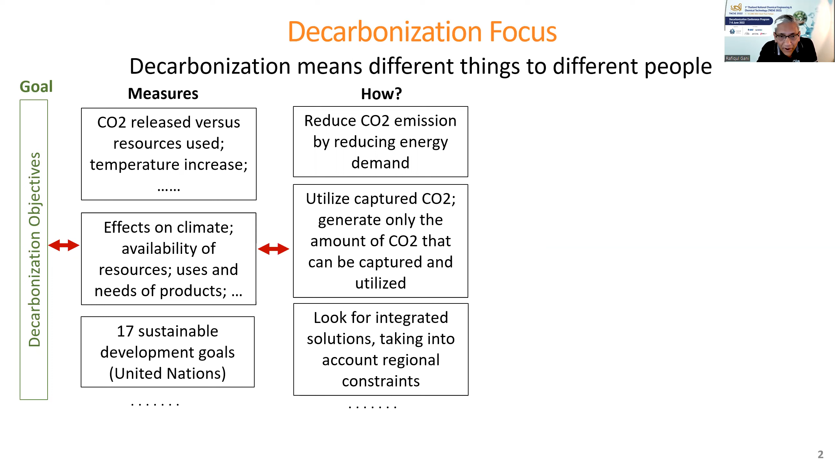How to achieve these measures? Obviously, by reduction of CO2 emission, by reducing energy demand, utilizing captured CO2, generating only the amount of CO2 that can be captured and utilized, looking for integrated solutions, taking into account regional constraints, and many more. The means to achieve these goals would be integration of ideas and concepts to develop significantly better technologies than we currently have, use new conversion and/or separation technologies that will also contribute, and develop and use methods and tools that can give significantly better solutions than those we are currently using, and again, many more.

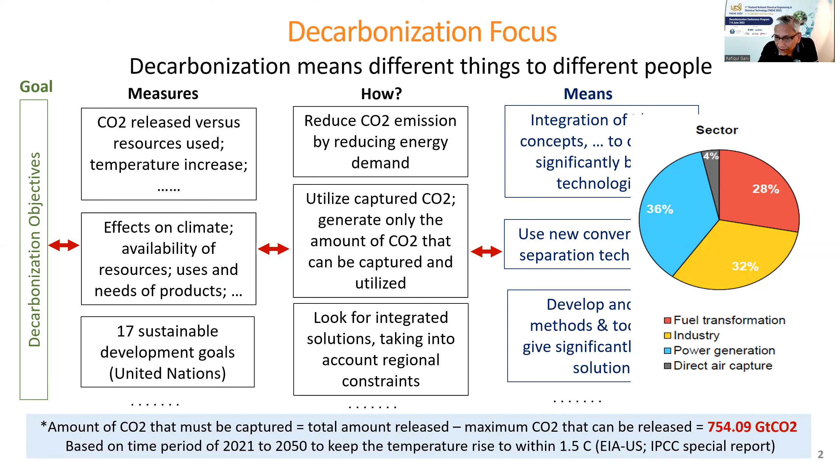We also need to take into account that within the period 2021 to 2050, if we want to keep the temperature increase to 1.5 degrees Celsius or less, we have to capture and utilize or sequestrate at least 754.09 gigatons of CO2. Out of these, 32% needs to be tackled by the industry.

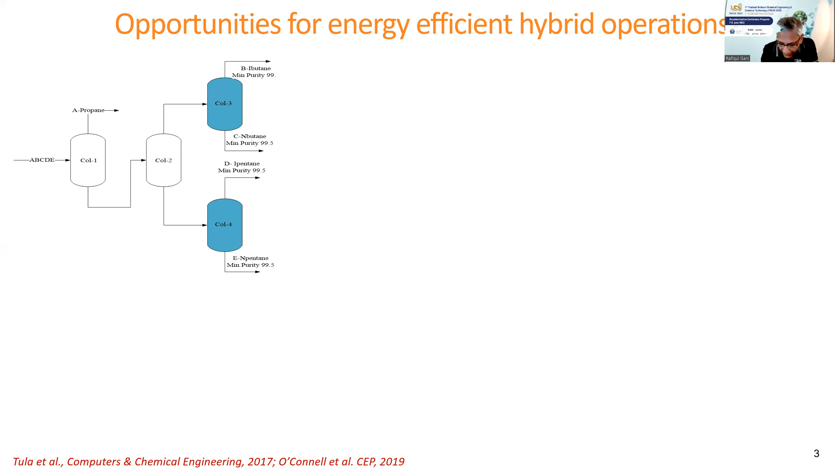Besides capture, utilization and sequestration, the CO2 amount can also be reduced by other means, for example, improved design and operation of processes. Chemical processes by definition are energy intensive, and within chemical processes, distillation operations are the most energy intensive. The figure on the left shows a distillation train that can be found in many petrochemical refinery plants, and they are the most energy consuming operations within those plants. So what can we do about the two distillation columns that are highlighted, which are among the highest energy consuming operations?

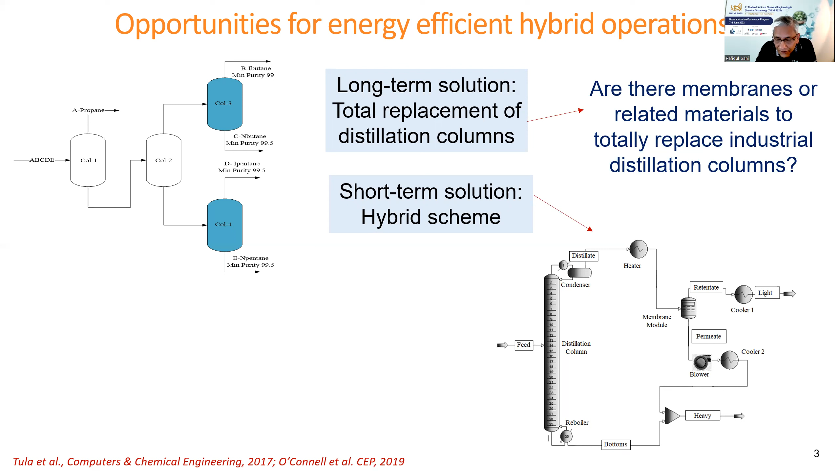We have a long-term solution: replace the distillation columns totally. However, that long-term solution is not yet available for use, so we can think of a short-term solution. The short-term solution is to integrate or combine the existing distillation column with a small membrane operation, which is completely feasible, combining them such that the distillation column does not use the same amount of energy, and at the end of the membrane operation, we get the purity of the product we are interested in. The rule for combining these two operations to get a hybrid scheme is to combine the two techniques, distillation and membrane, such that each operates at its highest efficiency. Savings of up to 10 to 50% can be achieved depending on the separation being done.

Considering that there are more than 200,000 distillation columns operating on Earth, the scope and significance would be very large if we can augment the existing distillation columns with a small membrane in a hybrid scheme, because we would be making an immediate effect. With that, I will not go into much more detail on improving chemical process efficiencies, but go directly to the topic of capture, utilization, and sequestration.

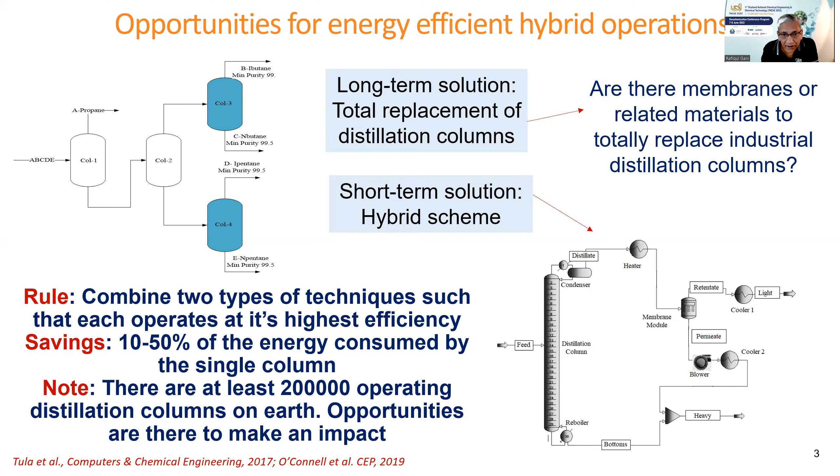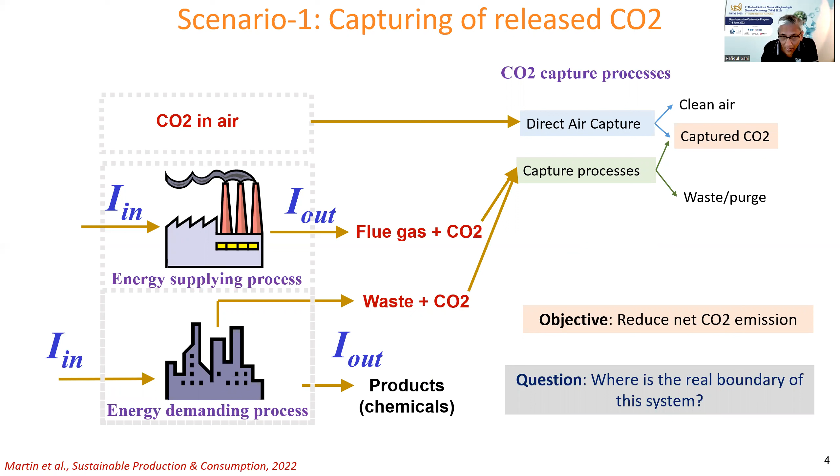What you see in the figure is a network of different alternatives that are possible to capture CO2 from air or from flue gas and get a purity of 90% or higher in the captured CO2, while also producing clean air. The network shows that steps 1 to 4 are needed for the capture process, because the capture process may need more than one operation. Then step 5, which also needs more than one operation but is shown in a simplified way, represents the utilization and sequestration alternatives.

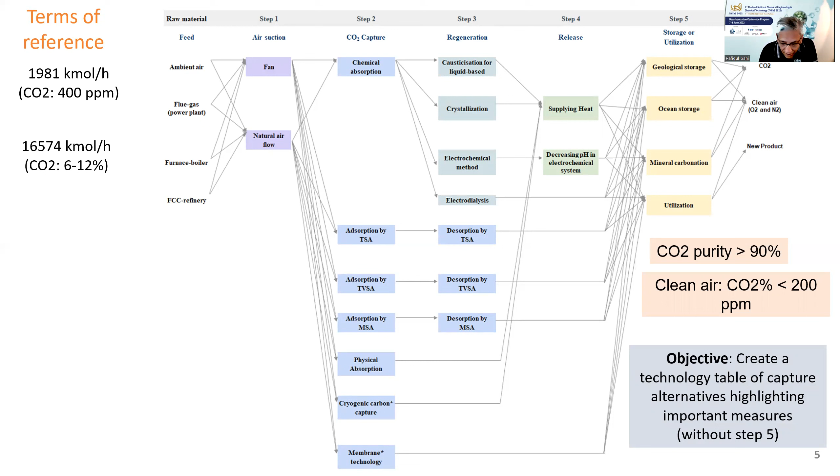Steps 1 to 4 each indicate an operation or a network of operations, especially steps 2, 3, and 4. These steps are shown in a simple way with one box, but in principle there are multiple alternatives within each. For example, chemical absorption or adsorption by TSA may have multiple alternatives to perform that operation. So in principle, this figure shows the possibility of a very large number of alternatives that can be applied if we have all the information needed to do the calculations.

So collecting all the information that we could find, we have calculated the total annualized cost, CO2 emission, and many more, just highlighting only a few of them. So we can calculate the operating cost, the capital cost, carbon footprint, net emission, and the objective is to create a technology table of capture technologies, highlighting the important measures.

At the end of the analysis, we give a score to each technology. Scores of 1 and 2 indicate that even after the capture of the CO2, the net CO2 emission is still positive because there are indirect CO2 emissions. Whereas scores 3 and 4 show that the net CO2 emission is actually negative. 2 and 3 are close to 0.

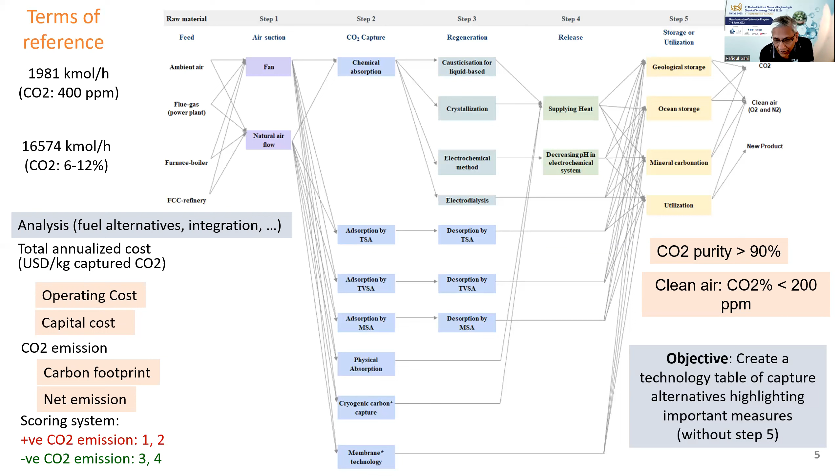So with this now, we can do calculations, and that is calculations of mass energy balance, sizing of the equipment, energy evaluation, all of those. And let me show you some examples first.

The DAC process that captures the CO2 from air, but needs energy from an energy supplying process. And we can do the calculation for this, and the boundary is shown.

However, if instead of just an energy supplying process that can be non-renewable, we can also use other sources of energy, then this becomes an integrated DAC, and the boundary is still the same, but now the net CO2 emission by definition would be lower.

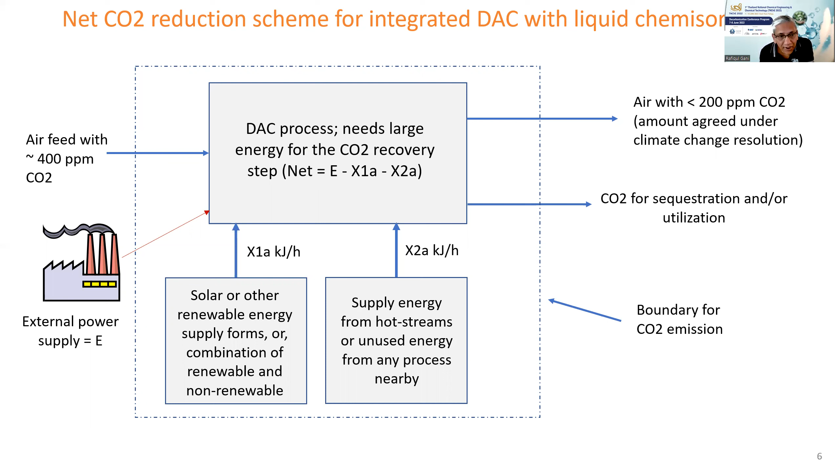And the third one is we combine the air-based DAC with the flue gas-based separation. And the reason we do that is that the air is much smaller, the flue gas contains much more CO2, and the flow rate is also bigger.

So we can combine the DAC and the flue gas in such a way that we still get net zero CO2. And we have the scheme for doing this, and the figure shows the different ways to capture the mixed air flue gas stream, and also recycle if necessary if we want to move from one alternative to another.

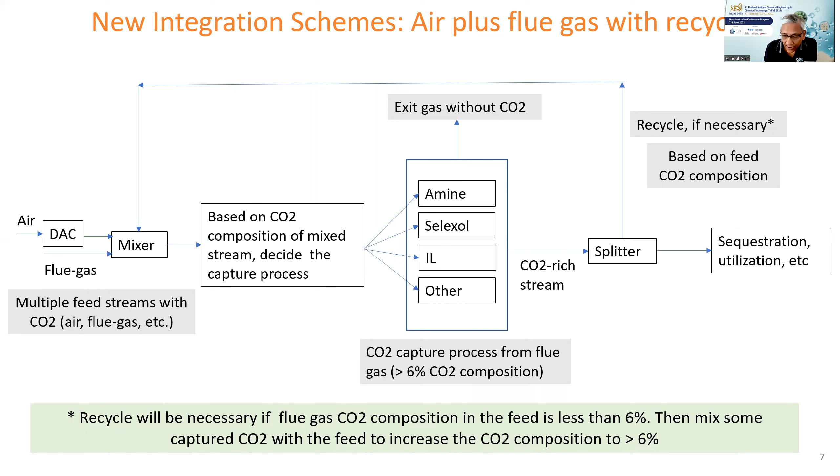So an example of this is shown here, where the DAC is a multi-stage membrane and the flue gas is absorption. And we need multi-stage membrane because the exit permeate CO2 composition that we need cannot be achieved in one stage because of pressure differences.

So we also combine here not only the non-renewable energy source, but also the renewable energy source. And the different alternatives are shown. The utilization and sequestration are not considered here. The objective is still to achieve net negative CO2 emission.

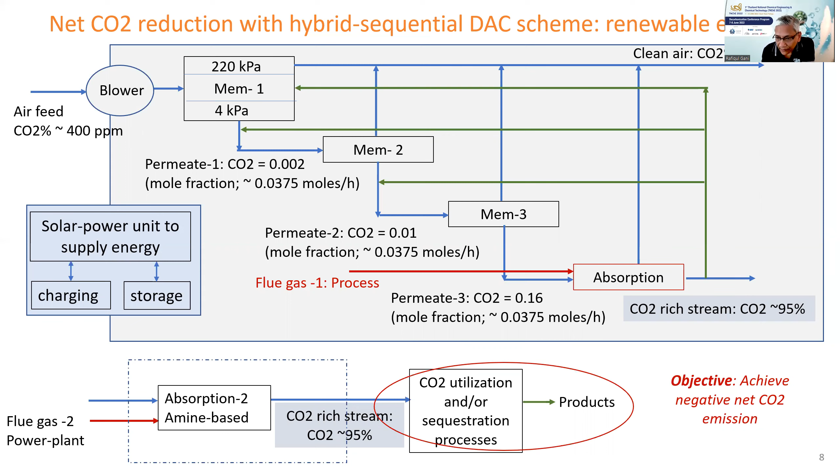We have generated schemes or technologies for more than 100 alternatives, and then we have classified them according to the different scores. And each of them we have the corresponding detailed calculations through which we have given the score.

So the first set is scores of 1 and 2, and you can see that many well-known processes like membrane-based physical adsorption, ionic liquid-based chemisorption, solid and liquid, these are found to be positive or scores of 1 and 2.

And an example of the technology table is shown here, only for a few of the calculated values, but there are more than 30 columns of calculated results for each technology.

Then we can show that by doing an integration, we can convert technologies of 1 and 2 to 3 or 4.

And here is an example of a physical adsorption process that is having score 4, but there is also chemisorption liquid and chemisorption with MOF and many more.

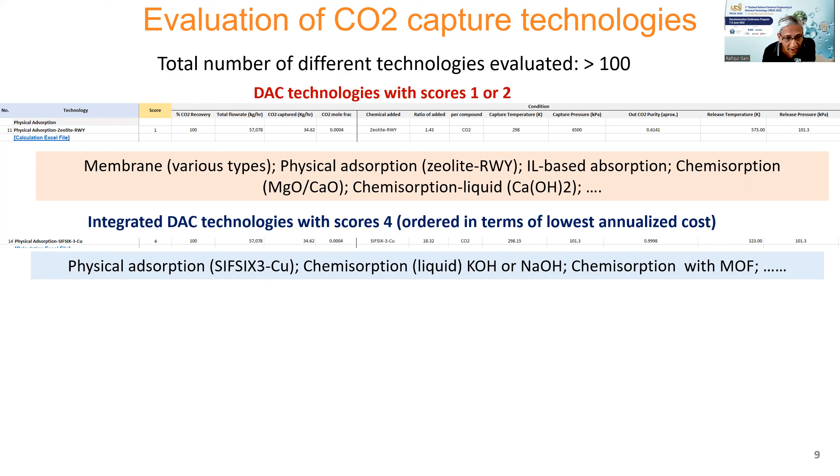And here is an example of integrated DAC technologies combined with flue gas with score 4. And one thing to note here is that membrane operation, which was originally 1 or 2, now combined with physical absorption, becomes a score 4 technology.

Similarly, physical adsorption with zeolite RWY type combined with physical absorption becomes a score 4 alternative. So integration is necessary if we actually want to have a win-win situation.

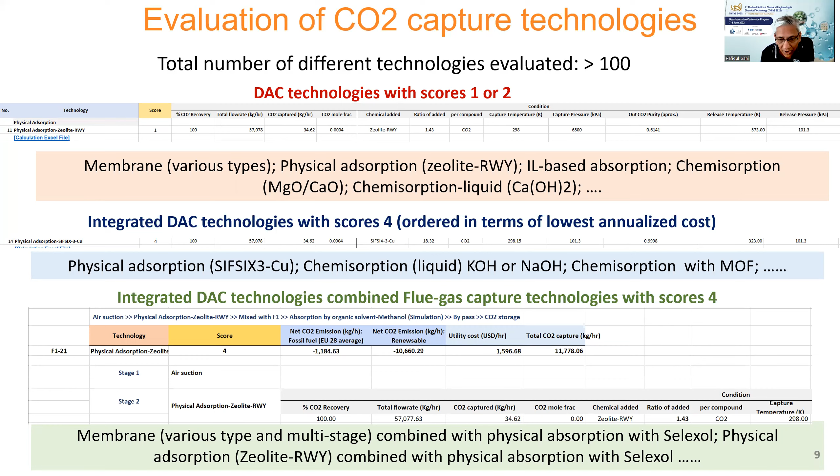So that was scenario 1, only about capturing. Now we want to keep the capturing that we have talked about before, and then use the captured CO2 together with the process to make something else.

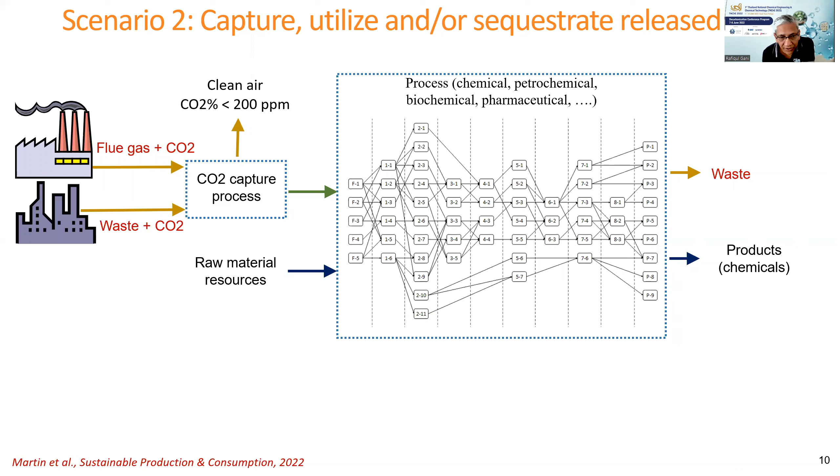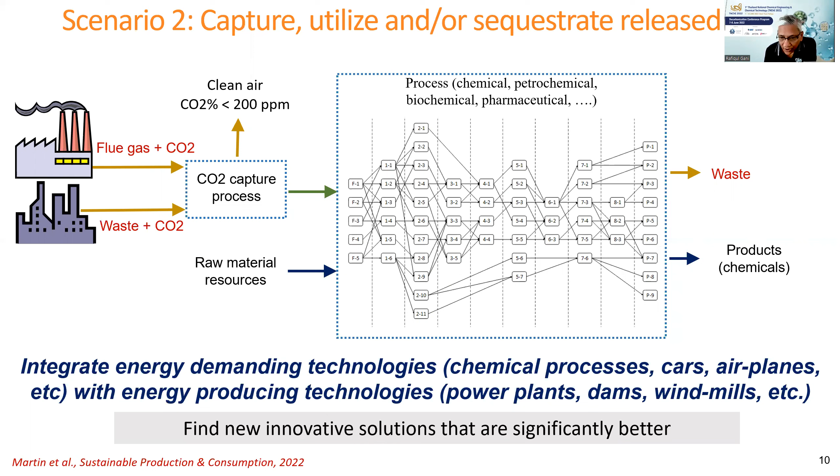So here is utilization. And so what we are doing is combining energy demanding technologies, that is the process, with energy supplying technologies, that is the flue gas, and other CO2 that is coming out in the air and flue gas. So combining all of this together, we want to find new innovative solutions that give us negative CO2.

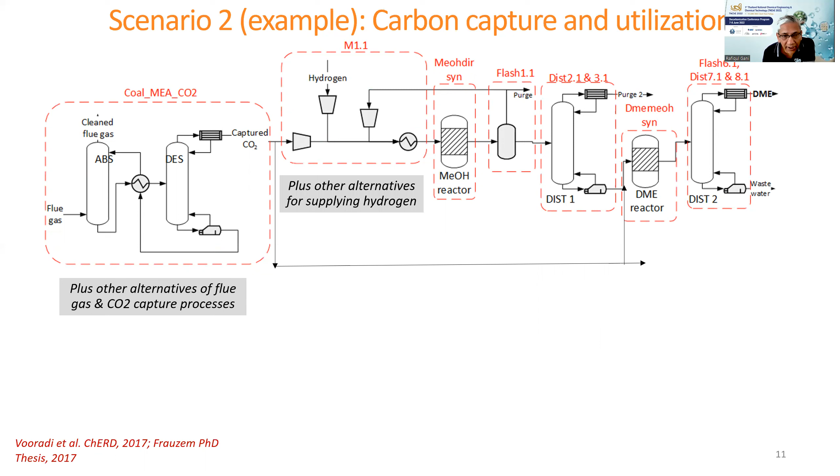Here is an example, and similar examples can be found. Many other examples can be found like this. We captured the CO2. We use the captured CO2 with available hydrogen generated in different ways to make methanol. Then we use the methanol with additional CO2 to make dimethyl ether, and there is unused CO2. In addition to dimethyl ether, we can also make dimethyl carbonate, succinic acid, and many more.

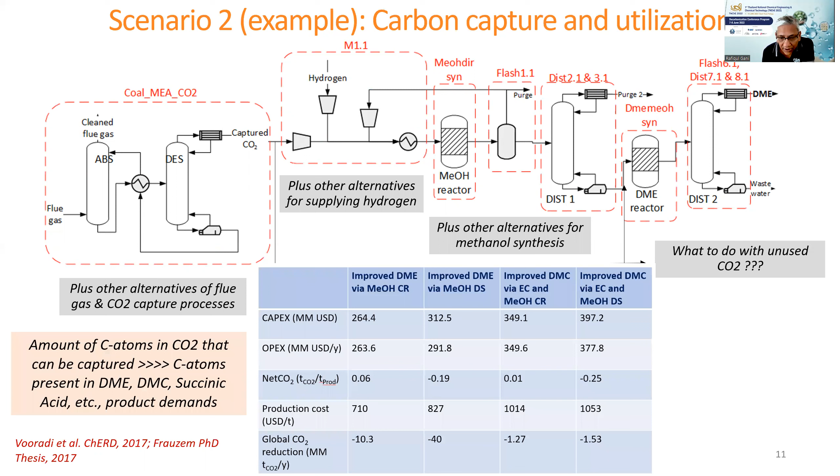The table shows the results, overall results, but it's important to highlight the row at the bottom where it shows the global CO2 reduction. And we can see that we can get negative CO2 emission for dimethyl ether, for dimethyl carbonate, for succinic acid and others. But is that good enough?

The amount of carbon atoms in the CO2 stream we have captured is much bigger than the total amount of carbon in dimethyl ether, dimethyl carbonate, succinic acid, and other products. So without sequestration of the remaining CO2, the impact on GWP will be very low. Sequestration, in my opinion, is not a long-term solution, but until a better alternative is found, it's a good way, at least temporarily, to get rid of the CO2 out of circulation.

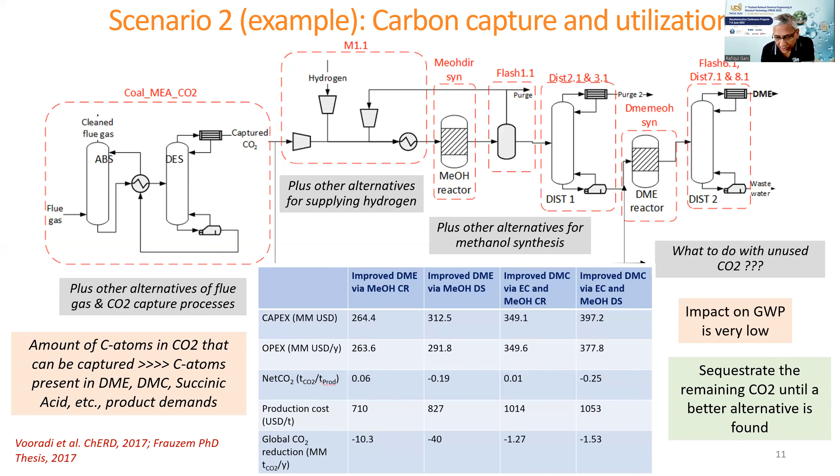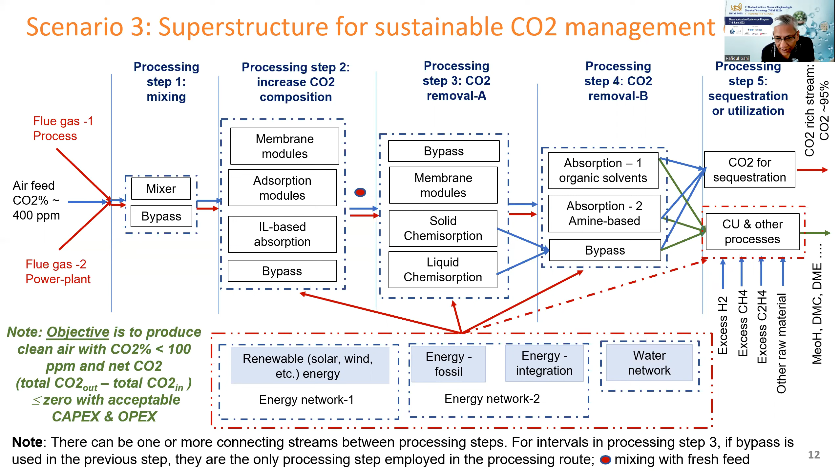So that is scenario 2. We have seen that scenarios 1 and 2 are not enough to achieve the decarbonization we need. The figure on screen shows the technology up to now: we have capture of CO2, we have utilization of CO2. What we also need is to integrate the energy networks, renewable and non-renewable, as well as the water network, to obtain a total integrated system where CO2 emission will be less than 100 parts per million. The net CO2 emission will be negative. This will be a totally integrated system with self-sufficiency for energy, minimum need for fresh water, and the products we need.

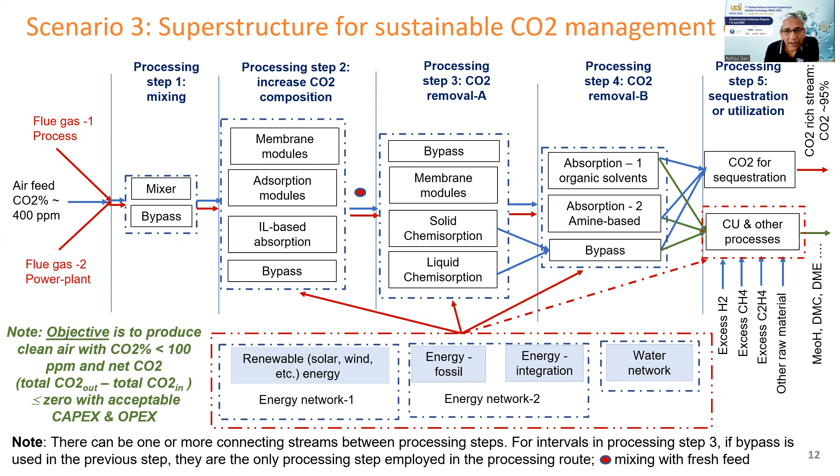Can we achieve this, or can this very complex, large problem be solved? We have solved one process, at least one example, and here are the details. We have the process shown in green. Then we combine this process with conversion technologies for energy, which will be the energy supplying process. Our original process is the energy demanding process. Whatever CO2 is generated from the energy supplying process will be captured and utilized by our process.

Similarly, we will do this for water from different resources, and we will recycle the used water to minimize the need for fresh water. So the objective here is to determine a sustainable network, networks and sub-networks within the total network, and optimize all of them together so that we have negative CO2 emission that is economically feasible, safe to operate, and so on.

We have published this example converting biomass plus CO2 to xylitol, achieving net zero CO2 emission with economic feasibility, safe operation, and so on under uncertainty. We have detailed conceptual design calculations showing the results for all the different parts together, and also different scenarios. If you're interested in any of them...

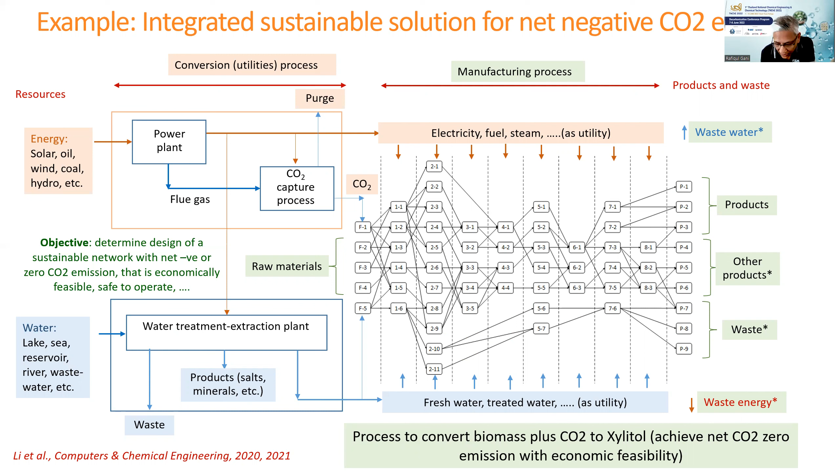Also for any new process that can be integrated in such a manner, we would be happy to help you do this. So finally, in conclusion, I would like to show some challenges. On Earth we have different resources that are not uniformly distributed, but we need these resources to convert them into the products we need for our sustainability. So the challenge is how to define the products to make, how to identify the raw materials that can be used, how to find a process that can manufacture the product in a sustainable manner, and many more.

We also have to think that we have a growing population on Earth, and by 2050 the global GDP will have to increase. That will require increased capacity for most commodities, which will require more energy, more electricity, more water, and more release of greenhouse gases.

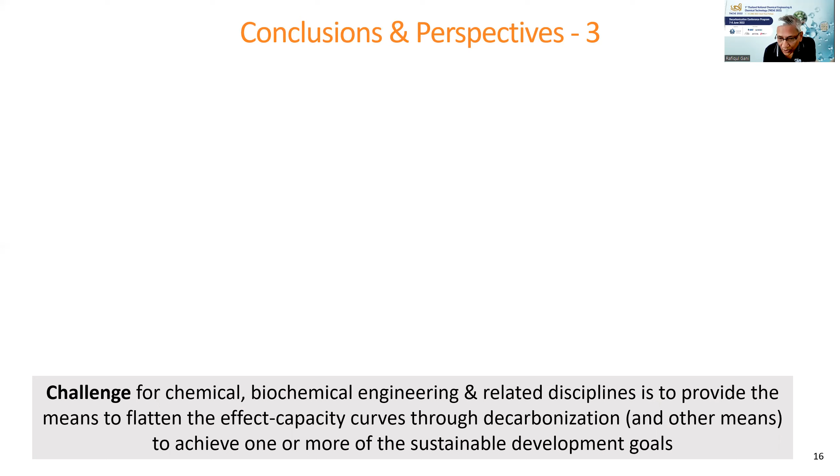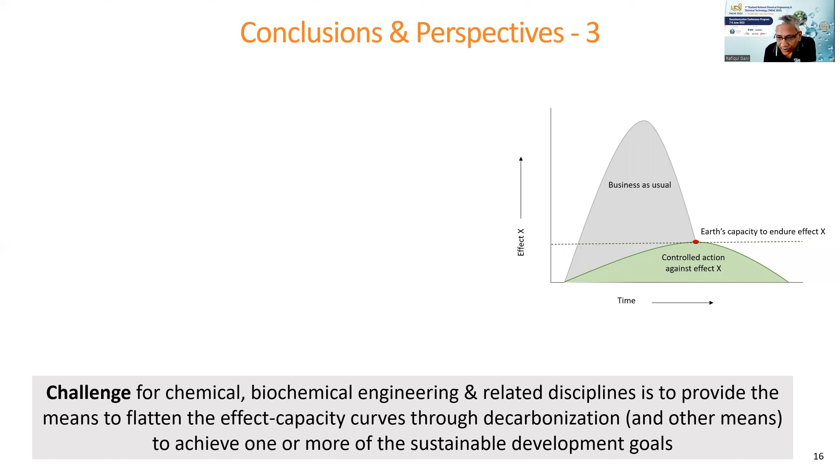We flatten the curve to be below the dashed line, which is Earth's capacity to endure a specific effect. There are many curves like this, and we have to flatten all of them to be below the capacity for Earth. If we can achieve that, then we will achieve one or more of the 17 sustainable development goals, and decarbonization has a big role to play in that.